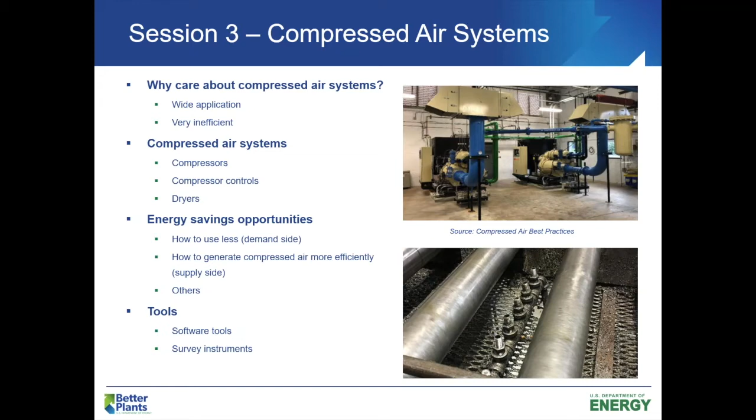Okay, so why should we care about compressed air systems at all? Well, they're pretty ubiquitous. I can't say that I've ever been into a manufacturing facility yet that does not have a compressed air system. That's my personal dream one day, is to walk into a facility that has zero compressed air and is serenely quiet. It's a little bit of a tall order.

So why do we have compressed air all over the place? Well, one is the convenience aspect for sure. But compressed air over time has been used for a lot of different applications. Some of the ones that you may have in your own facility could include conveyors, certainly pneumatic tooling, so maybe some grinders or impact wrenches, things like that. Machines and actuators, the solenoids, a lot of those are driven by compressed air. But in addition, paint sprayers and robotic arms—it's fairly easy to just drop in a line and plug in the compressed air and use it.

In addition, some of the reasons that compressed air has been so powerful over time are some of the benefits it has had over electrical alternatives. Everything from smoother power to better variable speed and torque control, certainly for our pneumatic tooling. And then there's the situations where there are possibilities of explosions or volatile compounds in the air—we don't want to risk having electrical shocks that may lead to other things. So compressed air has been really popular for all these reasons.

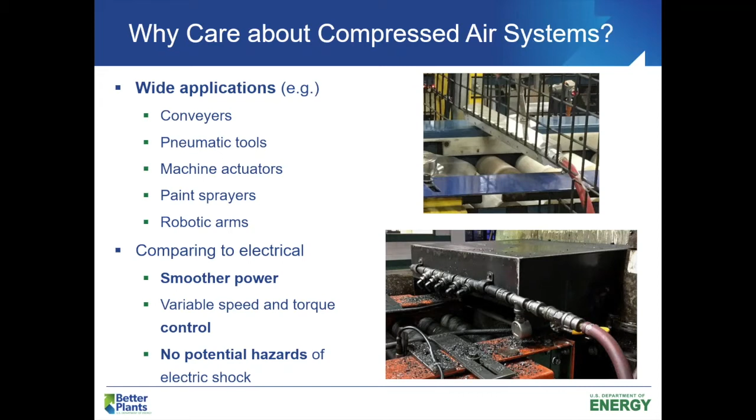The problem with compressed air, and the reason we really want to pay attention and focus a lot on it, is because one, it uses a lot of electricity for most of our facilities. In the DOE studies and the compressed air challenge information that's out there, it's typically not uncommon for a plant's electric bill to be consumed somewhere in the order of about 5 to 20% right in the compressed air system. So it's not a small number. But the problem, or maybe the eye-opening aspect of our compressed air systems, is that they're extremely inefficient. It's a very robust technology, but it's an extremely inefficient technology.

Compressed air is kind of the analogous of driving a semi-truck to work every day. Do you need a semi-truck to get yourself from your house to the plant every day? It does the job of getting you from point A to point B, but there's probably some better alternatives and definitely some cheaper alternatives. Really the most surprising aspect that not a ton of us know about with compressed air is just how much of the electricity that we put into that machine actually gets turned into useful work for us.

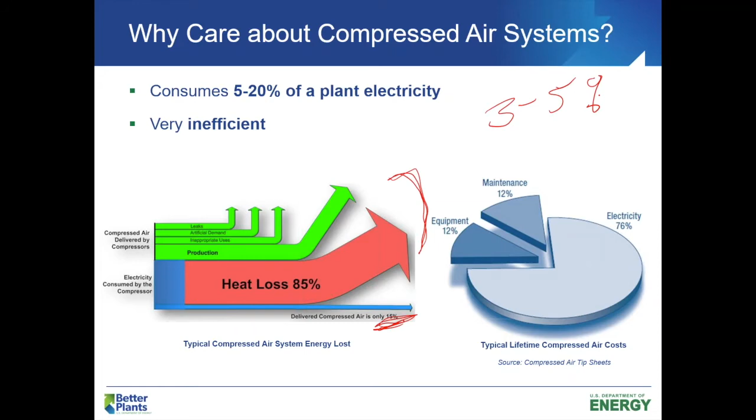We're gonna probably spend a little bit more time on this later on. At a high level though, let's understand what our compressed air systems are comprised of. What am I referring to when I say a compressed air system? For the most part, all compressed air systems have the same look and feel. There's different configurations, different equipment that get plugged in, but by and large it's the same general configuration, the same setup of sorts.

So here I have a diagram that has essentially a full compressed air system, everything from the generation side to the end use, and then we have the piping and distribution that goes around there. On the left-hand side here is our generation. In this case we have two compressors compressing air, pumping it into our header system that gets pushed out. There's a dryer in the system, and from the dryer we might have an air receiver, an air tank, or maybe a couple air tanks in our system. Then it gets sent out through the distribution system out to the plant, and this is where it's going to go to our end users.

And our end users can be a number of different things. We mentioned some of them, but there's these hand tools, right? Some of them are driving pieces of equipment, maybe robots, things like that. But this is the full system.

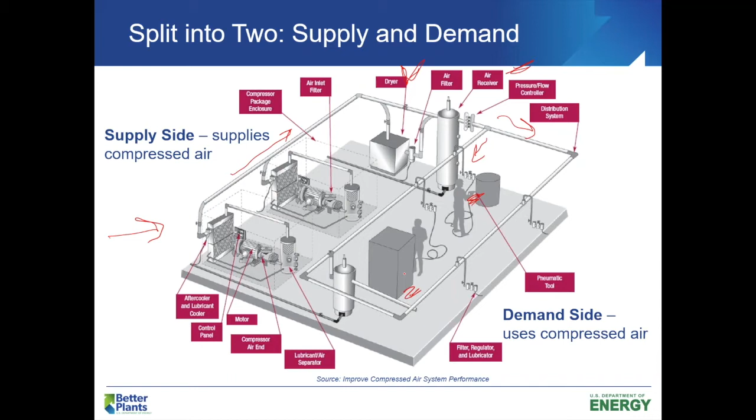It might look a little complex, and as you're thinking about your own facility, you might be going through the iterations of, okay, well I know I have this over there, how does that all work? A better way, or a much more simplistic way, is to just put it in block diagrams. I guess this is the engineering approach of taking a complex world and really simplifying it.

This block diagram really encompasses almost every single facility I've ever gone into, for the most part, with some slight variations. But this is everything from our supply side, so our compressors. We have our receivers - in this case we have what we call a wet receiver, because it's coming before a dryer. We're gonna have a dryer in our system. We might have a filter or a couple, and then we might have another big receiver on the back side - we call that the dry receiver. And then if you have a pressure flow controller, you might have that in there before it goes out into the facility. So what we're looking at here is essentially the whole facility, and you could easily do this for your own facility to really simplify the layout of the system here.

Really, this helps us to kind of visualize the supply versus demand side. To make it really simple, supply side is everything on the left-hand side - that's our compressors and all the stuff that goes on treating the air. And then the demand side is, well, everything where that compressed air is used, where it's demanded. So this is one of the maybe first steps if you're really gonna be looking and diving into your compressed air system - drawing a really simple drawing like this. My young children could do this, so most of us could do this, and this is a great starting point.

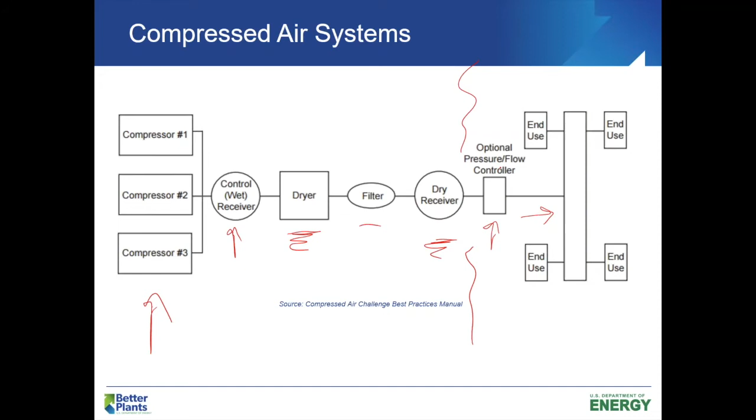So once we've done that and we've kind of understood our system a little bit, we need to understand our compressors. What kind of compressors are out there? There's a pretty large world of compressors. This is not a new technology - it's been around for a very, very long time. But there's really two big camps of compressor types. On the left-hand side we have our positive displacement compressors, and then over on the right-hand side, these are our dynamic compressors.

Most of us, most manufacturing, certainly in the small to mid-sized manufacturing, lives on this left-hand side with positive displacement compressors. The two main types of positive displacement are reciprocating and rotary. Reciprocating is somewhat similar to a car piston. Some of you, if you're maintenance guys with a little shop at home, might have a small compressor at your house - that's a reciprocating compressor. There's a little piston in there that just chugs along, sucks air in, and pumps up the pressure.

For industrial facilities, we're seeing less and less reciprocating. There might be some small systems placed around the facility, but for large main systems that supply a whole facility, that's definitely an older technology we're just not seeing very much of.

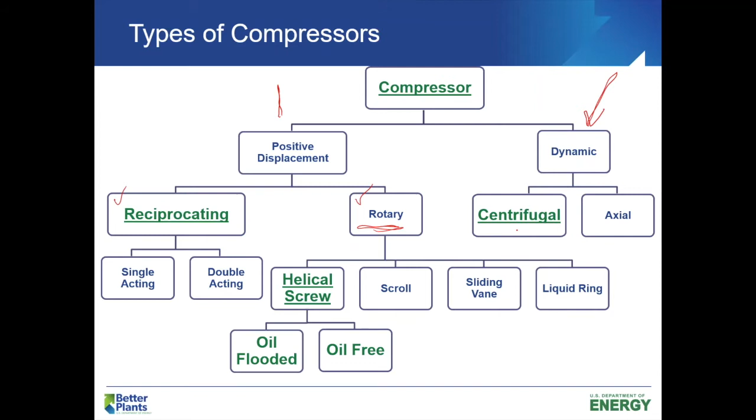If you're a really large manufacturer with really large compressed air needs, that's where you start getting over onto the dynamic compressor side. The main one there for our industrials are centrifugals. You don't see these unless you get into really large facilities. So to recap, the three big ones we're going to see within manufacturing are reciprocating, rotary screw, and centrifugals.

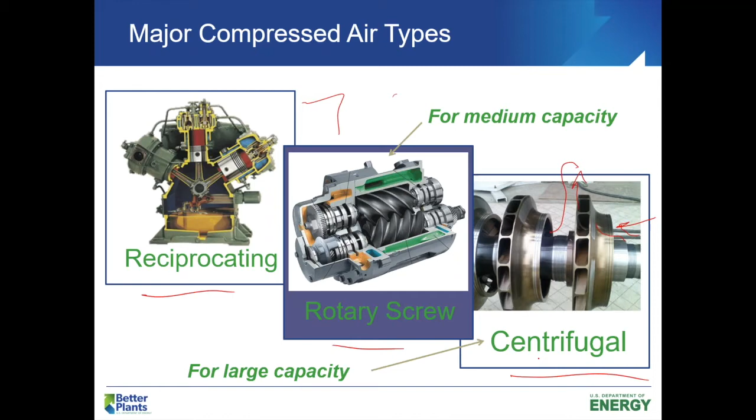These are the three main types of compressors you'll see within a manufacturing facility. But within most, 80% of the world, we're looking really at these positive displacement - reciprocating and rotary screw. For really large facilities, that's where we start looking more at the centrifugals. So that's understanding those three main types of compressors that we typically see.

The next level of detail with all these compressors is really how they're controlled. There's a couple basic methodologies, a couple different basic approaches for how these compressors are controlled. So we're going to step through and better understand the types of compressor controls that are applied to those various compressor types. The first one, maybe one of the easiest to think about, is just basic on-off controls.

As your system pressure goes down, it flips a switch and says, hey, we need more air. The compressor turns on, and then it'll just keep going until it pressurizes the system up to maybe a maximum level, and then the switch gets kicked again, and it just turns things off. These are the most common controls that you would have on a reciprocating compressor.

So this is, again, if you think back maybe to your garage, that little pancake compressor you have in your garage or shop, that's the methodology there. It kicks on when you need it, kicks off when you don't. This is the most efficient way of running these things. It runs when you want it, and it doesn't when you don't need it.

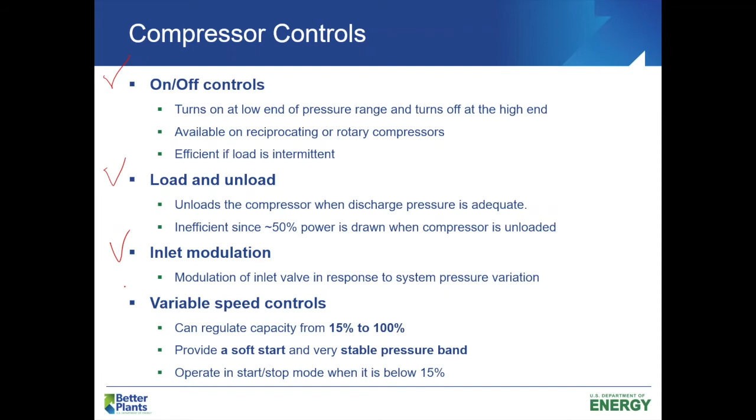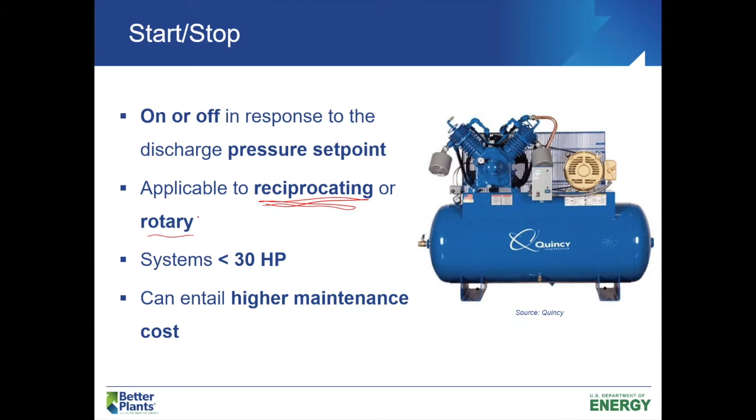So some different control strategies across all of these. Stepping into these a bit more, start and stop, as I mentioned, is the main one we see with reciprocating compressors. You might have a couple of these around your plant for small demands, or in your workshop at home, but the most common start-stop approach is really in reciprocating compressors. There are some cases where we see this in rotary screws, but I'll talk about that more on the next slide. More often than not, because it's reciprocating, these are smaller systems, typically under that 30 horsepower range, and one reason we don't see as many large reciprocating compressors in industry anymore is the higher maintenance cost associated with it.

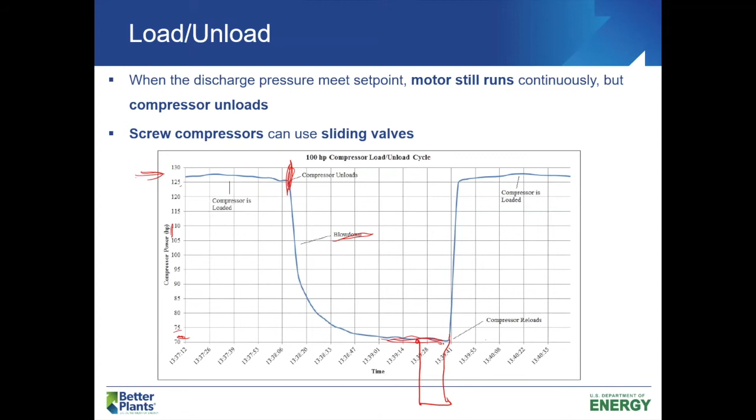With inlet modulation, there's a range of applicability. It can typically modulate our compressors anywhere from about 40 to 100%, give or take on that bottom end. So that's another very common approach you might see.

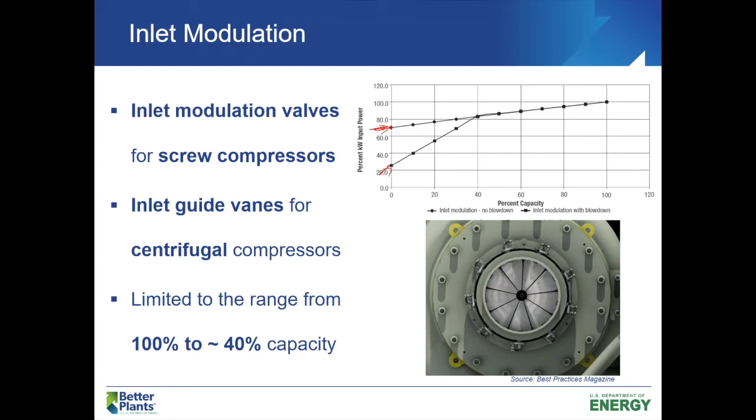Now the last major control is our variable frequency drives, or variable speed drives. This is essentially just turning that compressor to the point that it's producing enough air for the system, not more, not less. It allows it to ride along with the pressure demands of the system, and it's really the most efficient way of delivering air to our systems.

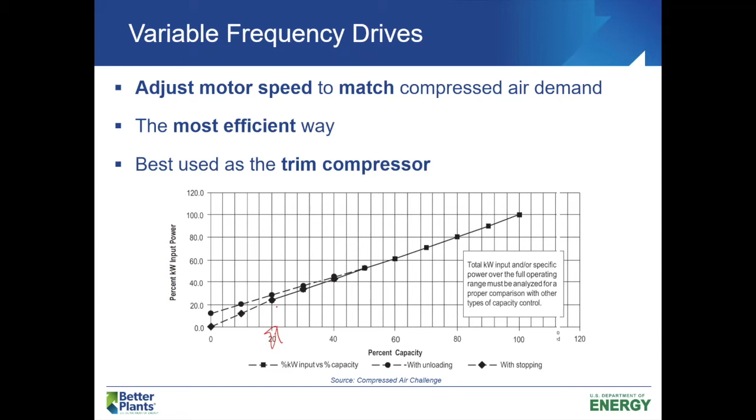The graph we're looking at here is actually very similar to the one for on-off control, where it's more or less a one-to-one approach - if you're at 50% capacity, you're using roughly 50% of the power needed. As you keep going down, you get to a point where it can't continuously keep slowing down. There's a point where it just has to turn off for a little bit, and then it'll cycle in an on-off fashion. So these variable frequency drives are really important, and they're fairly strategic in terms of how you use them.

In terms of controls, if you don't have a VSD or a system controller, almost all compressors have local controls that you would set. For most compressors, you'd set a band as to when it should turn on and when it should turn off. Think of these as little switches. When the pressure gets too low, a switch flips and says, hey, we need compressed air into the system, let's start producing.

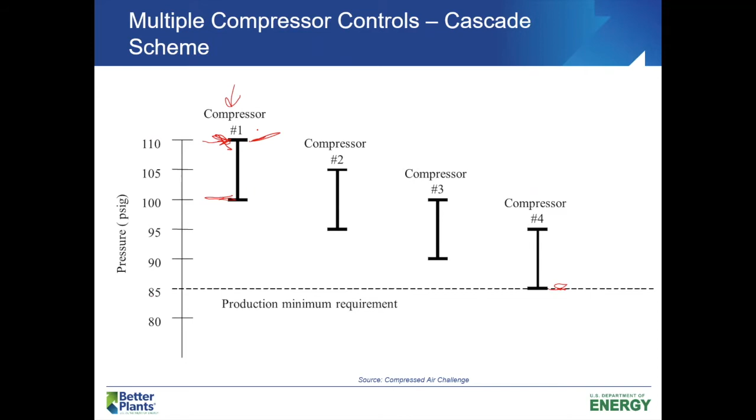So one of the changes we're seeing a lot of is going to networked controls—you might call it a smart controller, or just automated controls with a central computer doing the work for us.

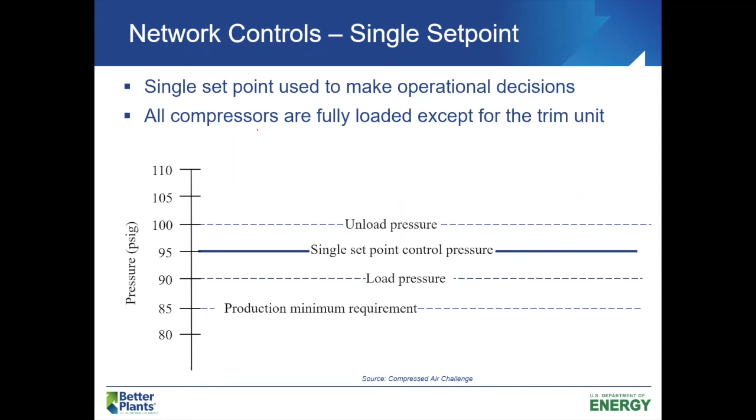This is a much better way of controlling our systems, and it also gives us some maintenance benefits, being able to cycle through our compressors to make sure they're having even run times and things like that. So what does that look like in theory?

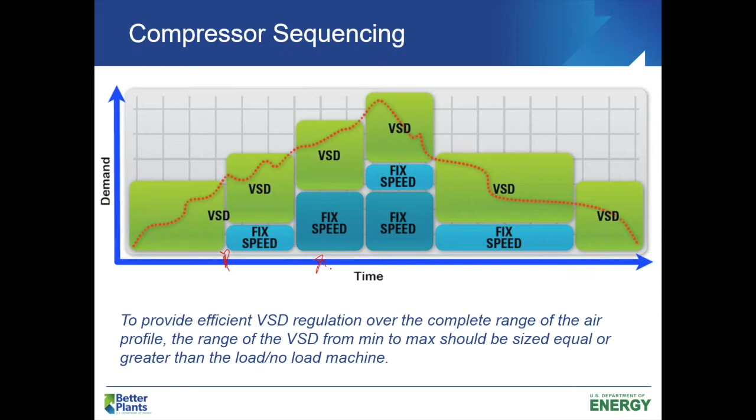As consumption keeps going up, we might kick over to a different, larger compressor. This is a really standard block diagram view of how these compressors might be staged as your consumption goes up through the day and as it comes back down, so that we're always maximizing and utilizing the most efficient compressor at every given time.

After we've created our air with our compressors, and figured out how to best control those things, the next step in the system diagram is for the air to start going out to the system. But one of the first stops it needs to take is our air dryers. You might be asking, why the heck do we need air dryers in our system? Why do we need to be drying our air? That's a really good question.

For most of our facilities, there's a lot of moisture, a lot of water that is in the air naturally. As we compress that air, water is incompressible, and it stays in that air as it travels through the system. As we compress air, it gets really hot, so that water vapor can stay in the air. The problem is that at some point that air naturally cools down in your pipe. Because we've compressed that air so much, it actually raises the dew point of our air, meaning the air can't hold that water anymore.

In this case, if we take 50-degree air as it enters the compressor and pump it up to 100 psi, it raises the dew point up to 115 degrees. So if that air drops below 115, water starts to condense and form water droplets in our system. Most of us don't want that in our compressed air piping, in our machines, our actuators, our cylinders. Certainly if we're spray painting, we probably don't want it there either. We need to get it out, because if we don't, it leads to corrosion issues and contamination issues.

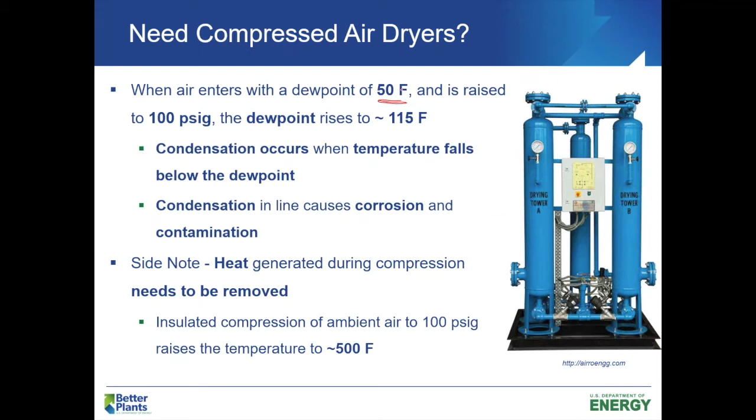So strategically, we need to be able to cool the air and dry the air to make sure we get that moisture out so we're not harming our system. There are a couple different types of dryers used traditionally in manufacturing systems. The most common, and probably the one at many of your facilities, are what we know as refrigerant-type dryers.

These are really cheap to buy for the most part, and fairly cheap to operate. They essentially work on the exact same cooling cycle we use in our refrigerators, our chillers, the little AC unit to cool your house. It's the exact same thing here, except instead of cooling our house or a refrigerator, we're just cooling the air down. The standard operating procedure for a lot of these is that it cools the air all the way down to 35 to 40 degrees F, which knocks out most of the moisture content in that air. It may then reheat it and pump that compressed air out into the system, nice and dry.

Okay, these things are almost always air cooled, meaning they'll dump the heat that is created through this process just to the ambient air. So if you have this in your facility, you're making your facility warmer. If you have it outside, you're pumping that heat outside. And so part of the placement of these things matters.

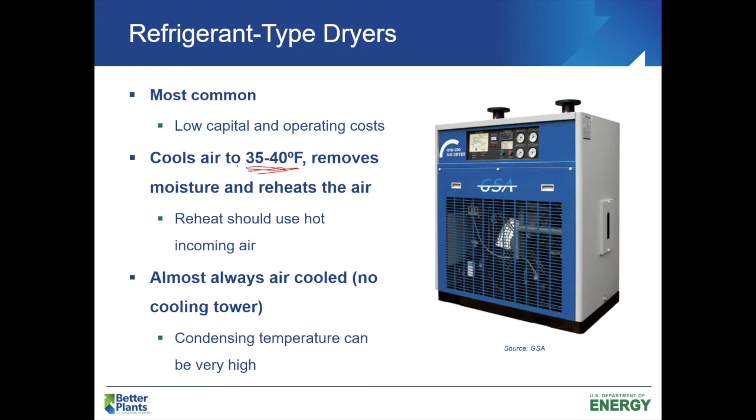Okay, a second type of dryer that we see is something we call a desiccant type of dryer. So desiccant material, really there's a material inside of this dryer that will absorb the water as air passes through it or by it. Okay, the most common type in industry are something we know as a twin tower regenerative dryer.

Essentially what is happening is that these towers are filled, it could be with a silica gel or a kind of ceramic or an alumina type of material, but they're materials that want moisture, they attract moisture, okay? And so as we pump our air through the system, as it goes up, the air gets drier and drier because the water is being sucked out of the air and held onto by that desiccant material. And then as it gets up out of the top and goes into our system, it's really nice and dry.

In some cases, these desiccants are able to get down to a -40 dew point temperature, which is great if you need that dry of air, okay? The problem with many of these things is that it's more costly.

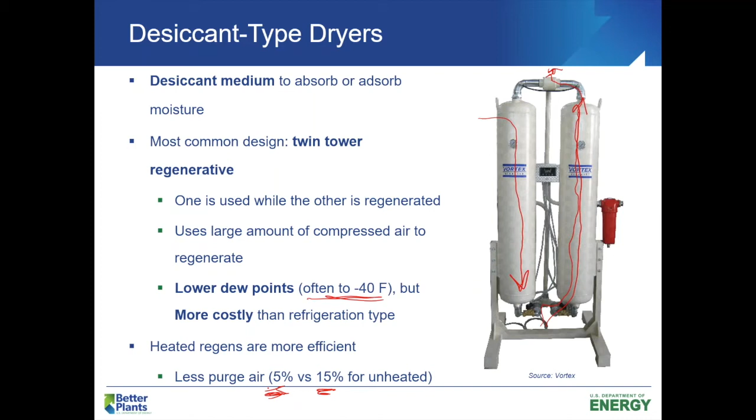All right, so now we know some of the major components of our system. We've talked about the different types of compressors, we've talked about the dryers, and that's really all on the supply side, okay? So that's really where we're making compressed air. And there's a couple strategies you can use on that side, but the other half of the coin, because really this is a two-sided coin here - one, we can either produce that air more efficiently on the compressor side, or we can figure out just how to use less air, right?

And so there's a lot of opportunities on the consumption side, on the demand side, that really can play back and have some major impactful savings opportunities for us back at the compressor. So we're going to talk about a couple of these things.

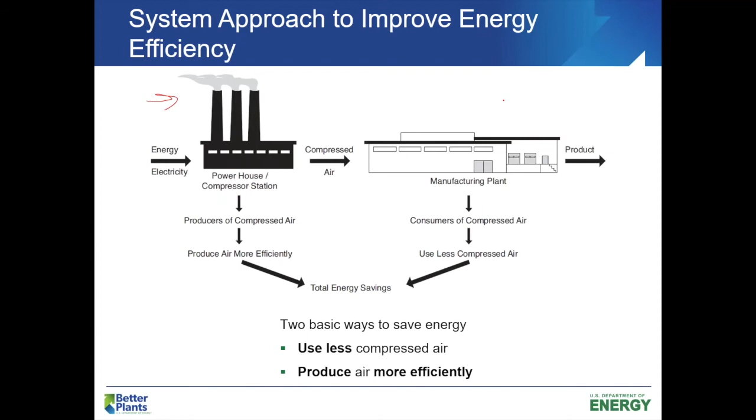So one of the most common, unfortunately, losses that we see are really purely in just leaks. I mean, this is kind of sad to say, but our systems degrade, the couplings start to get a little bit weaker over time, and we just start leaking air out of our system all over the place.

Historically, based on some of the DOE studies, we've seen upwards of 20, even 30% air loss just in the leaks. So you're compressing all that air, and a fourth to a third of it is just lost. It's unused air, just lost through the system. And personally, I've been into facilities that have been upwards of 50%.

So 50% of the air generated at the compressor is lost in a facility, not used at all. And if you remember back to the first couple slides, I mentioned these systems are terribly inefficient to start with. So if you're generating a lot of air at, let's say, 5% efficiency, and then you lose 50% of it, what does that do to your overall efficiency here?

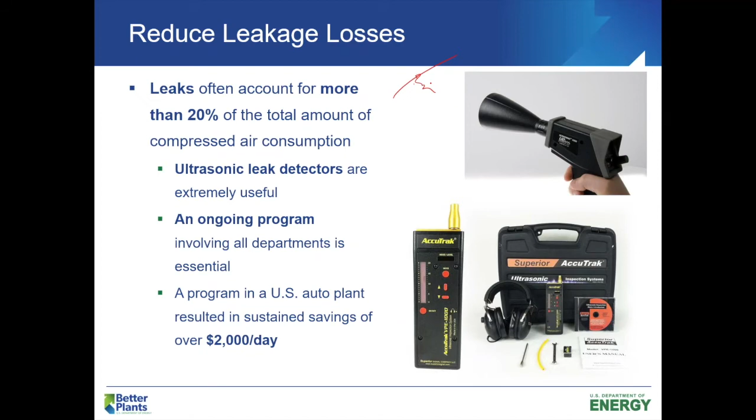If you can get down to roughly a 10% leak rate in your facility, that's actually not too bad. That's a pretty good low level of leakage in a facility. So this is a major opportunity, this leak loss, and identifying it.

Here's a chart that you can refer back to later, but essentially what this is showing is the level of leak loss through various sized holes. Everything from a really, really tiny one, 1/64 of an inch, all the way up to a quarter of an inch is huge, and 3/8 of an inch is deafening. It shows the SCFM, the standard cubic feet per minute, out of each of those holes based on the system pressure that you might have.

One of the things to really note here is that as your system pressure goes up, you're also losing a lot more through your leaks. That's something known as artificial demand. So really, if we're able to reduce our leaks, if we're able to fix them, in some cases it's almost like a double win for us. So it's really important to be looking for these things and fixing them as much as possible.

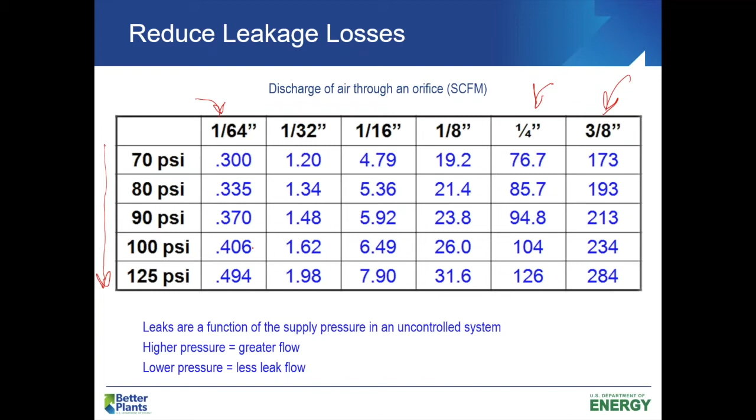Typically, what we've seen in experience over time is there are three really good ways of doing this. One is just having a routine, standard operating procedure, maybe where you do a bit of a maintenance walk. This could be as the last guy is leaving the facility, before you shut it down for the weekend, or on the weekend, have somebody walk around, and if the facility's not running, a lot of times you can hear these things as you walk through a facility.

If your facility is never off, if you're always running, that's where these ultrasonic leak detectors can make a big difference, because you don't need the facility to be quiet to start finding where those leaks are at and trying to figure those things out. But a maintenance walk is one really excellent way of identifying these leaks.

The second one is starting an employee tagging program, where you enable employees to identify some of these leaks, tag them, and feed that work order back into the system. And you can set these things up such that it could be a bit of a game or a competition within your manufacturing facilities.

There are some companies we've worked with that have turned this into an internal competition and made it fun, with prizes associated with it, because even small leaks cost big money. The folks at the end of the line, where most of the leaks are at, are probably the best ears and eyes on the ground level to immediately identify and tell you it's been leaking like that for a couple of months.

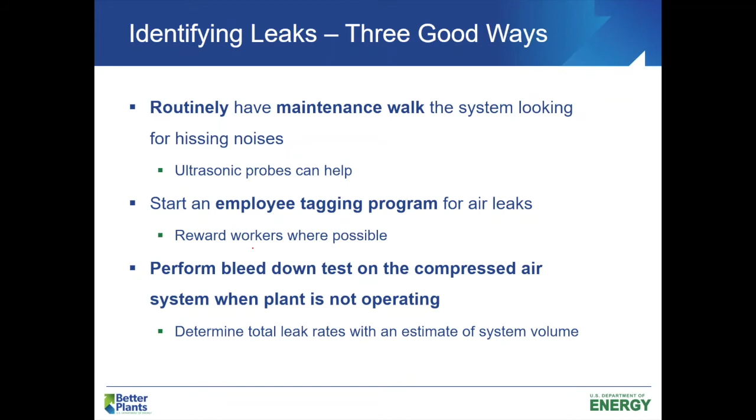Another major opportunity on the demand side is understanding where we're sending our compressed air or using it, and asking why we need compressed air instead of something else. Knowing our compressed air systems are some of the most inefficient processes, do we really need to use compressed air? There are a lot of cases where you don't, and more opportunities now to swap equipment out for electric driven options instead of traditional compressed air.

So there are some really inappropriate, bad uses of compressed air. One is cabinet cooling. Another is liquid agitation or stirring, maybe a paint or water tank that needs to be agitated - compressed air is not a good way of doing that. Vacuum generation, maybe operating suction cups. Unregulated open blowing, like blowing off parts, is incredibly common all over the place.

Air motors and atomizing are two more standard inappropriate uses of compressed air. You see them all over the place - there's a couple pictures on the right. These are essentially all unregulated open blowing, where it's just the end of a pipe.

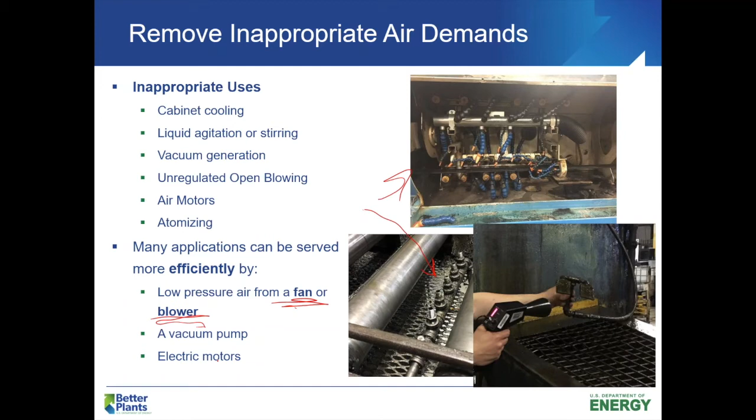So some other benefits to switching away from compressed air. Another big opportunity within our compressed air systems, related to the demand side but felt on the generation side, is lowering our pressure set points of the system - meaning dropping the entire system pressure to the lowest possible point without impacting equipment.

The reason this is such a big opportunity is the savings potential. For every 2 psi the system pressure is dropped, it's about 1.5 to 2% energy savings - almost a 1-to-1 savings in some cases. If you drop 1 psi, you can expect 1% energy savings. That's not only from the compressed air generation based on the physics of compressing air, but it also saves in that leak loss rate we talked about earlier. There are some really big impacts just by slowly ratcheting down that pressure.

A lot of people struggle with this concept. Over time, somebody raises their hand and says, hey, I'm not getting enough air pressure over here, my piece of equipment's not working. The typical knee-jerk reaction in most of our facilities is, okay, we'll just increase the pressure over at the compressor. We'll just jack it up to the roof. It says it goes up to 125, but just set it there.

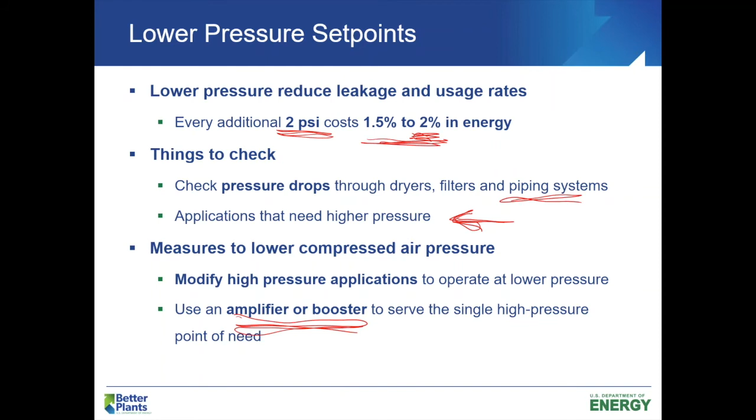And that's a really good opportunity, because one, we know the lowest system pressure that we need, okay? We just bump it up a tiny bit, but then we can investigate that one piece of equipment, talk to that one operator who's not getting enough air, and zone in to see, okay, is it because you have 130 feet of tiny hose, or is there something else going on? Why can't your system accept the pressure being delivered? This is powerful, again, all because it comes back to that 1.5 to 2% for every 2 PSI. These are big opportunities. So another common opportunity here, and this is moving back towards the compressor, okay.

Another common opportunity is to relocate your compressor intake—move where you're sucking in air to compress to a cooler place. In a lot of cases, especially up north, drawing in outside air to compress makes sense because for most of the year, the air outside is going to be a little colder, a little chillier, a bit more dense than the air inside your facility.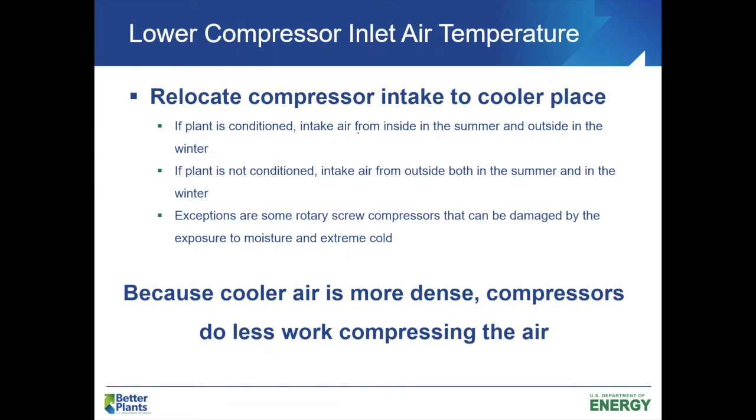You just figure out strategies for when you draw from outside and when you don't, because some compressors, if exposed to freezing temperatures, might run into issues—so you might need to dilute the air a little. But at the end of the day, cooler air is better to compress because it's slightly more condensed or dense. Nature is already compressing it for us a bit, meaning our compressors don't have to work quite as hard. These strategies are typically simple to implement—it could just be a PVC pipe that goes from your compressor inlet out the wall to outside.

Another very simple, very common opportunity in a lot of systems is switching to a no-loss drain. These are typically in our distribution systems, at our dryers or tanks, where condensation occurs and water drops out of the system. Historically, interval-based timed drains were used—every 5 or 30 seconds they'd blow compressed air to push all the water out. Fairly effective, but costly, because it wastes a lot of compressed air.

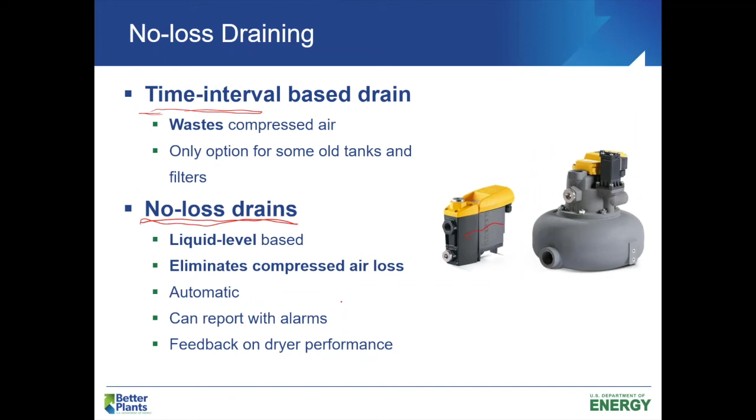The newer technology that's been around for a while are no-loss drains, which essentially work on a float-type approach based on liquid level. As liquid collects, it waits for the liquid to reach a certain level, then pushes it out without wasting compressed air. This is a really common and simple opportunity. If you get really smart, you can even tie these into alarms or reports on pieces of equipment—really good opportunity for the drains.

Another major opportunity is recovering waste heat, and this really only applies to air-cooled compressors, which are probably most of them in your facility. These are a bit trickier because now we're talking about ductwork and how to arrange or push air around the facility. But remember the efficiency of these systems—maybe 5% efficient, right? So where's most of the electricity going? What's happening to most of that electricity coming into our compressor?

Well, 80 to 90% gets turned into heat. So if you want to be efficient with a compressed air system, you need to figure out how to capture that 80 to 90% of the electricity you paid for and use it effectively. For a lot of us, the simplest and most effective way is to duct that exhaust right back into our facility. During the winter, instead of running your steam system, hot water system, makeup air units, or burning natural gas, we take the electricity we already paid for and duct it right back into the facility to heat it. That's a super effective way of doing this. Most of these are set up with a damper, so when you don't need to heat the facility, the damper switches position and kicks that heat outside. This is one of the most simplistic ways of capturing waste heat—there are other more complex ways, like potentially heating water with some of these systems.

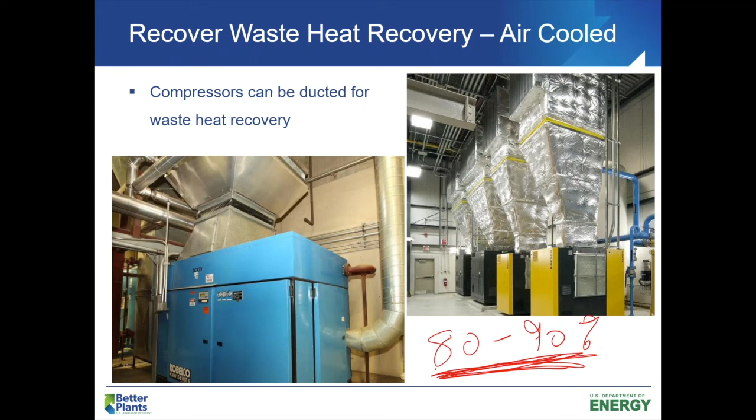You can, if you have a hot water need within your facility, maybe for washing parts, or maybe you have a large domestic need, set these systems up to generate hot water instead. This waste heat recovery is something to think about, because 80 to 90% of the money you put into this thing just gets turned into heat, which most of us just dump right outside.

So here's a second example of that waste heat. The first one on that previous slide was in terms of HVAC heating, so heating our facility. The second one is setting it up for water, so heating our water. In some cases, we can even get up to 180 degree water. Really, these are best situated if you need that year round, because there is a little bit more of a capital cost in terms of getting the right heat exchangers in there.

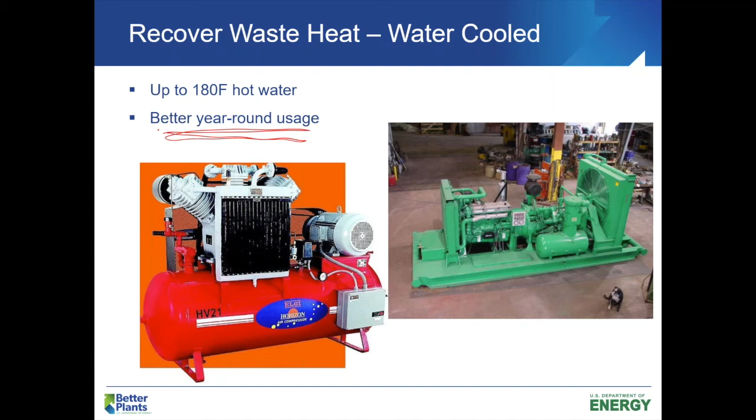So we talked about the overall system, the types of compressors. We talked a little bit about the end use and some of the opportunities, from limiting leaks to the no loss drains. We talked about some of the control strategies. Well, for a lot of us, that's a lot of moving parts. How do I pull this together into something that I can take action on?

And that's where the DOE has really spent some time over the years and has some nice, effective, streamlined tools to help us understand what are the opportunities and what are the cost savings for this stuff. So the main tool that I want to point you to and call out here is the AirMaster Plus software tool. This allows us to do modeling on our system, so it allows us to create a model of your compressed air system, and then it allows us to go through and do the what-if analysis.

If we were to change our control strategy, or reduce our system pressure, or reduce our demand or leak rate, things like that, what does that mean in terms of dollars and cents? Because for most of us, that's the most important piece. So this AirMaster tool is excellent. It's out on the DOE website, completely free, with a lot of capabilities in here.

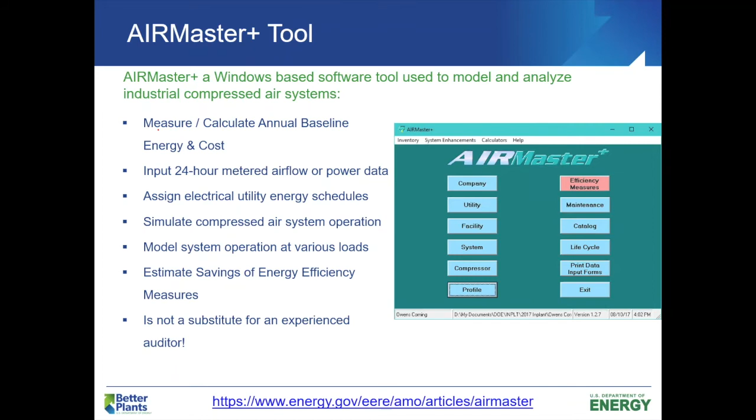There's a second tool that goes along with that AirMaster tool, and that's known as the log tool. The log tool really is set up to help us transform our utility data that we get from loggers. It will transform it, helps us to do some of the quick energy analysis. It's specific to AirMaster. This log tool helps us to take that logger data, which we might have 5-second data off of our compressors.

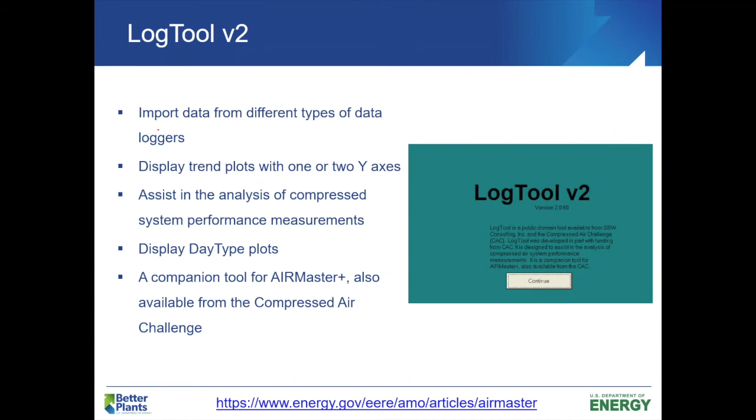And we want to convert that - maybe what's our day type look like? What does that compressor profile look like each hour of each day? This tool is set up to be really slick, so we can just dump in our logger data and then pretty quickly turn around and spit out the inputs for AirMaster. This is also free, up on the DOE website.

The third tool that at some point is going to really gobble up and replace AirMaster and that log tool is what we know as our MEASUR software tool. We're going to talk quite a bit more about the MEASUR software tool in some of the upcoming webinars. But this software tool is really the newest version of the DOE's effort to consolidate all the software tools under one common framework. Right now we have most of the various systems that you'd find in a facility within here, so everything from pumps to fans to steam and process heating.

There's a module in here for doing your own treasure hunt. Here before too long, we're going to roll in that AirMaster functionality, so compressed air systems, as well as that log tool functionality. And so this software tool is set up to help us analyze each of these systems - it can help us set up a system model and then walk us through the ability to do the what-if analysis to see what the energy savings are for changing any of the variable parameters. In addition to those system modeling and analysis capabilities, this software tool also has a lot of small calculators - roughly 45 to 50 currently, and that is being added onto every day.

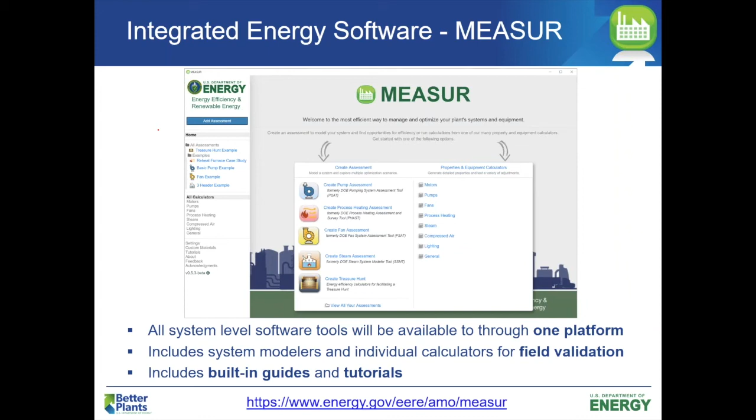Again, similar to all the DOE stuff, completely free, really powerful stuff. So we're getting close to the end here, and I just wanted to give a little bit of a recap as to what we had talked about and some of the things to think about.

Of the energy saving possibilities, I'm going to list out the top 5 here just to recap it. The first and foremost is looking at the end use of where you're using compressed air and questioning, do we really need compressed air? Do we really need a system that is 5% efficient to deliver our compressed air for this component? Or can we do something else? Is there an electric alternative? Really trying to eliminate some of those inappropriate uses.

Does Fred really need to be blowing himself off with compressed air to cool himself down, right? Can we get a fan? Can we get something else to help him out? So questioning, why are we really using compressed air?

And then as we start to work back out towards the compressors, minimizing our compressed air leaks. As hopefully you recall, 20 to 30% of most system air is lost through leaks, so there's a big opportunity just identifying and reducing leak rate.

And then as we keep going, lowering the system pressure to the minimum level allowable - working over time to reduce that compressed air pressure. Again, it's that 1% savings for every 2 psi-G. That's real money, so we want to try to zone in and lower that level as much as possible.

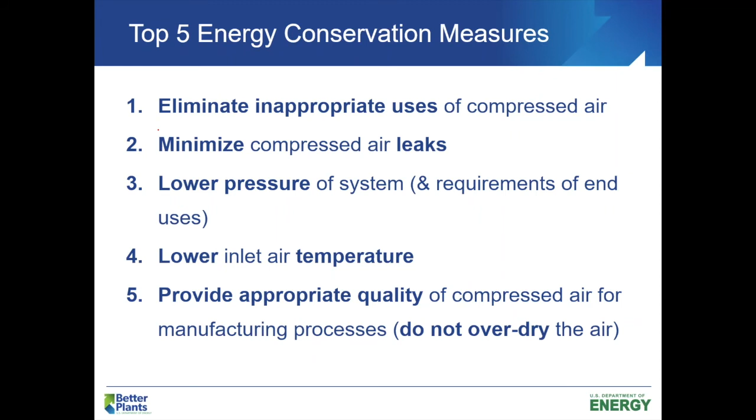I have a couple rules of thumb just to lodge into the back of your head, because these are powerful - really powerful when it comes to compressed air. The first one is lowering the compressed air set points by 2 PSIG results, in this case, in approximately 1.5% savings. In your facility, it might be more, up to 2%, or it might be a little bit less, but this is pretty close to what we see very commonly.

The second item is lowering that compressed air inlet air temperature by 10 degrees will result in approximately 2% savings. So if you think about that room where all your compressors are sitting and how nice and toasty warm it might be, if we can just suck in air from outside most of the time, that's some real savings as well.

The third rule of thumb here is this: 80 to 93% of all the electricity that you paid for is going into heat. As we think about that, is there a way that we can reuse it? Is there a way you can pump that back into your facility, especially during the winter time? You've already paid for it, so is there a way you can use it somewhere effectively?

These last two go to the inefficiency of compressed air in many cases. For any facilities using a compressed air driven motor, maybe a little motor you're using to stir some paint - a 1 horsepower air motor requires roughly 7 to 8 horsepower back at the air compressor. This further drives at that inefficiency aspect of things, so that's not something to gloss over. If we can replace a 1 horsepower air motor with a 1 horsepower electric driven motor, there's a big delta there, because currently if you're using that air motor, you need 7 to 8 horsepower back at the compressor.

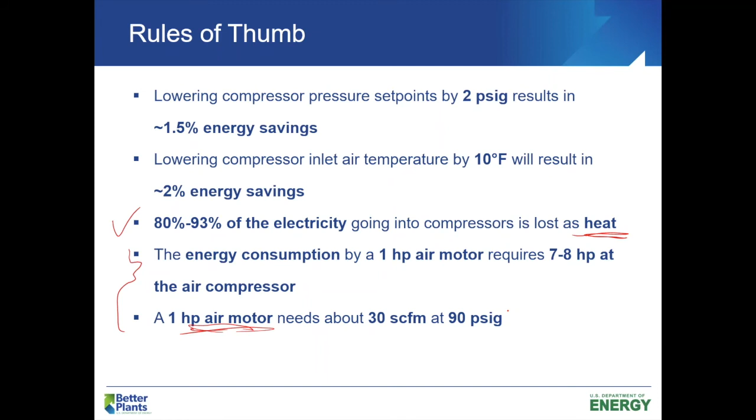This last piece is that a 1 horsepower air motor needs about 30 SCFM at 90 PSIG. And if you're using a higher pressure, you're using even more air through there. So some really good rules of thumb to keep in mind and have close to you as you're thinking about opportunities in your system.